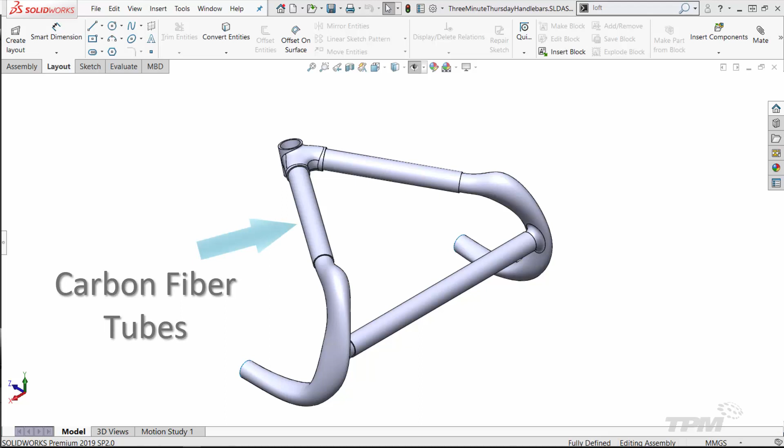This is Luke Woodard, and today we're going to smooth out joints using surfacing techniques. For this surfacing example, I'm going to use a recent idea I had for a bicycle handlebar. Instead of 3D printing the whole area and getting in trouble for using all of the material, I'm using stock carbon fiber tubing and printing smaller parts. One of those parts is a lug to join the stock tubing to the steerer tube.

While I could create some simple extrudes, add some fillets, and call it a day, that doesn't look so great. I want more gradual transitions and smoother blends, so I'll fire up my surfacing tab. To model this lug, I'm going to go through 4 steps. They are: 1. Use surface extrudes for the basic shape. 2. Trim those surfaces away. 3. Use surface lofts. And 4. Finish it up with a filled surface.

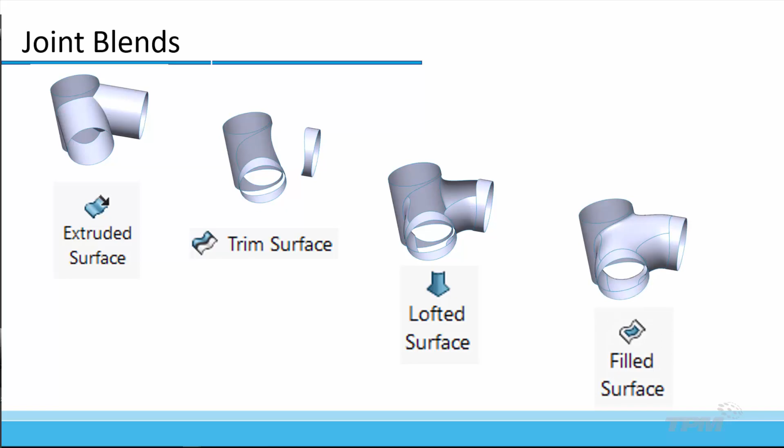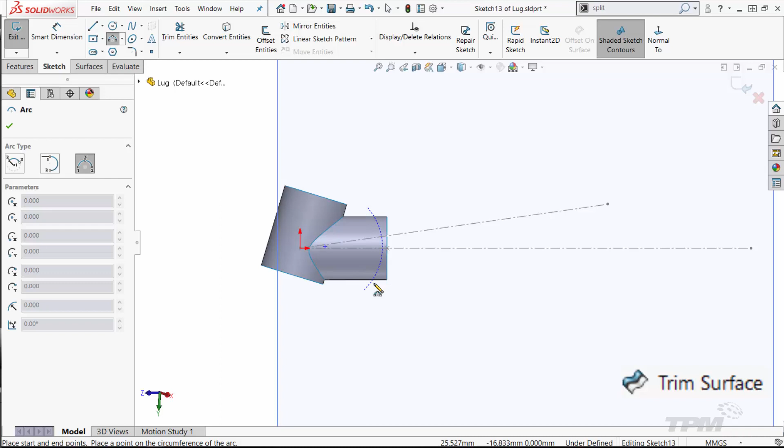Starting off, I'll sketch out profiles and create 2 extruded surfaces, representing the basic outside shape of this lug. I won't do a third yet, as I want to take advantage of symmetry and mirror that after we trim. Now for the critical step in this process. I need to trim the tubes back to where I want the blends to start. I'll draw a general trim shape for this tube.

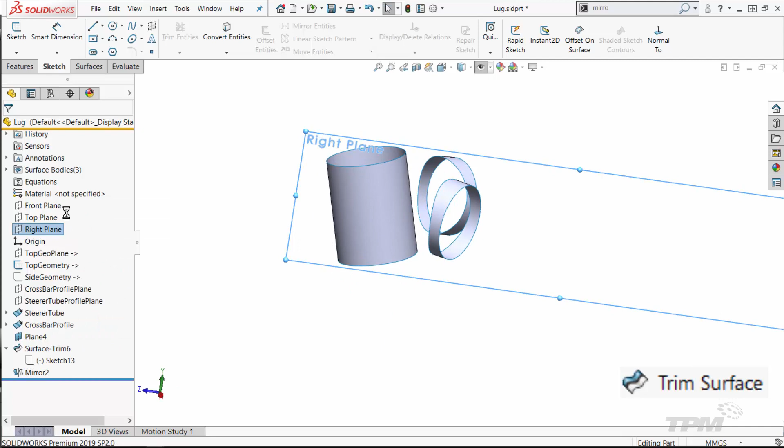If we were to trim this now, we would be left with just one continuous edge, making the next steps impossible. So we're going to go back into the sketch and use the Split Entities tool to split up that arc, and that will give us 4 separate edges. After doing that, I'll take advantage of symmetry and mirror the result. I'll do a very similar thing with this main tube. Sketch a profile I want to get rid of, use the Split Entity tool, and then trim. Notice that for both trims there is one less sketch segment than there are edges.

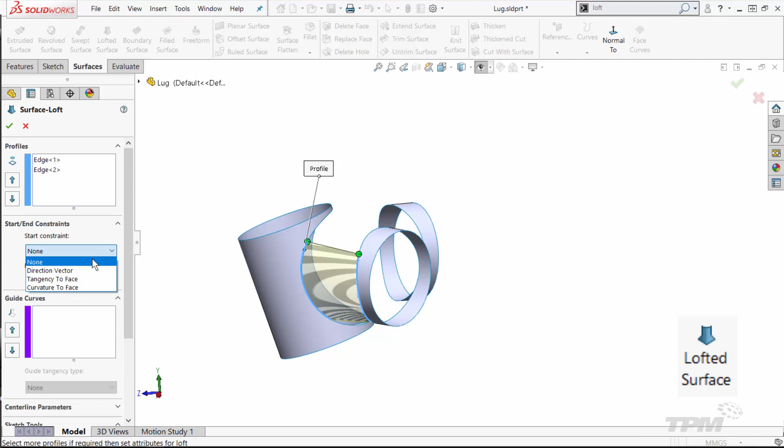Now that we have everything trimmed away, we need to loft between surface bodies. To do so, I'll use the surface loft, grabbing respective edges to add bounding surfaces. To better control the end result, I can use start-end constraints and tangency influences. Once I have surface lofts between all of my trimmed tubes, I want to patch the rest in. The Filled Surface tool works great for this. I'll apply edge settings to get nice curvature continuous geometry.